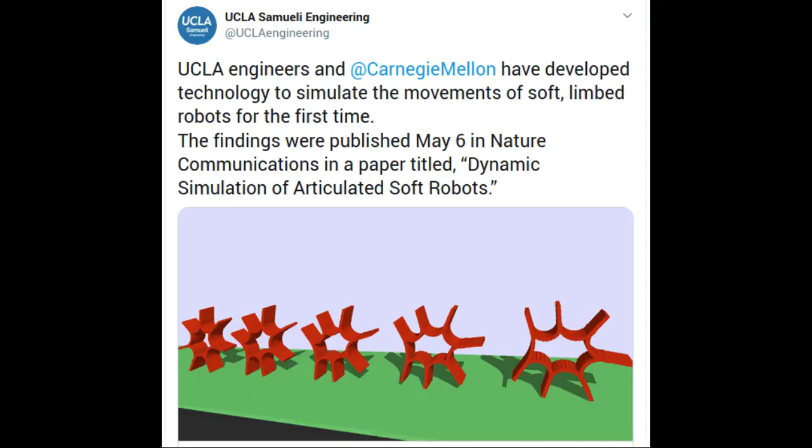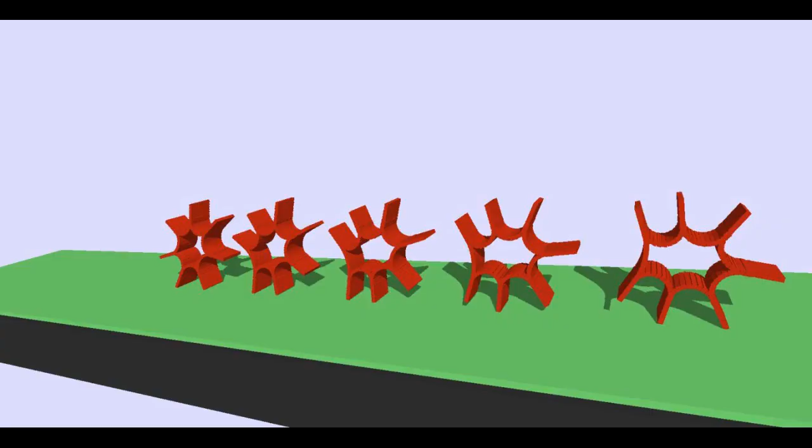Researchers have developed technology to simulate the movements of soft limbed robots for the first time. Soft robots are primarily composed of soft materials that can allow for mechanically robust maneuvers that are not typically possible with conventional rigid robotic systems. However, owing to the current limitations in simulation, design and control of soft robots often involve a painstaking trial.

Motion picture animation and video games are impressively lifelike nowadays, capturing a wisp of hair falling across a heroine's eyes or a canvas sail snapping crisply in the wind. Collaborators from the University of California, Los Angeles (UCLA), and Carnegie Mellon University have adapted this sophisticated computer graphics technology to simulate the movements of soft limbed robots for the first time.

The findings were published in the journal Nature Communications in a paper titled Dynamic Simulation of Articulated Soft Robots. The researchers have achieved faster than real-time simulation of soft robots, and this is a major step towards such robots that are autonomous and can plan out their actions on their own.

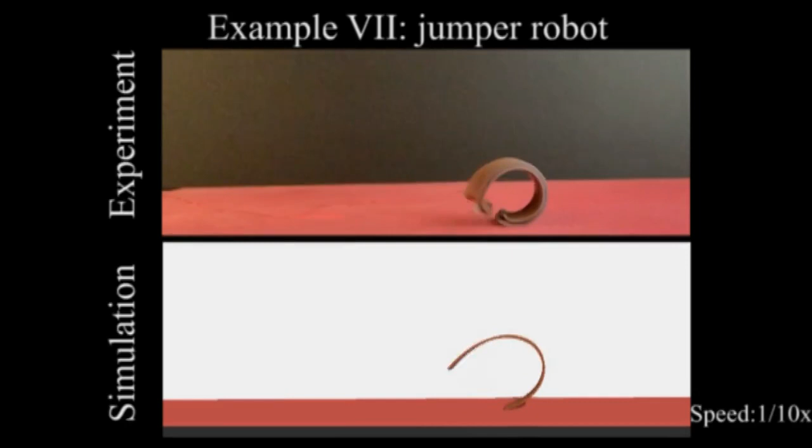Soft robots are made of flexible material which makes them intrinsically resilient against damage and potentially much safer in interaction with humans. Prior to this study, predicting the motion of these robots has been challenging because they change shape during operation. Movies often use an algorithm named discrete elastic rods (DER) to animate free-flowing objects. DER can predict hundreds of movements in less than a second.

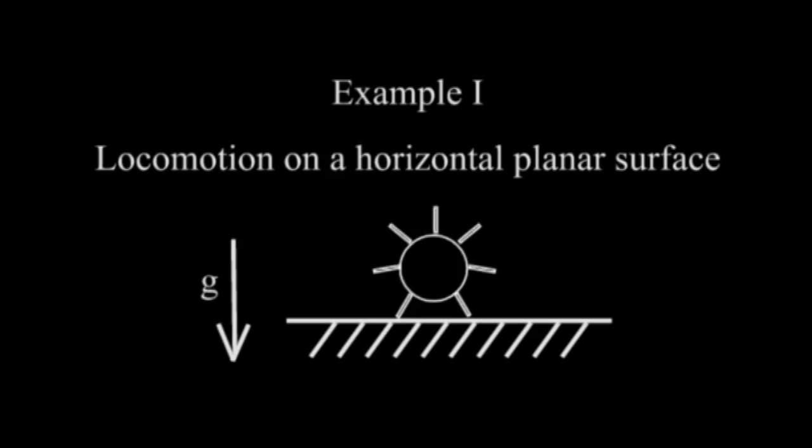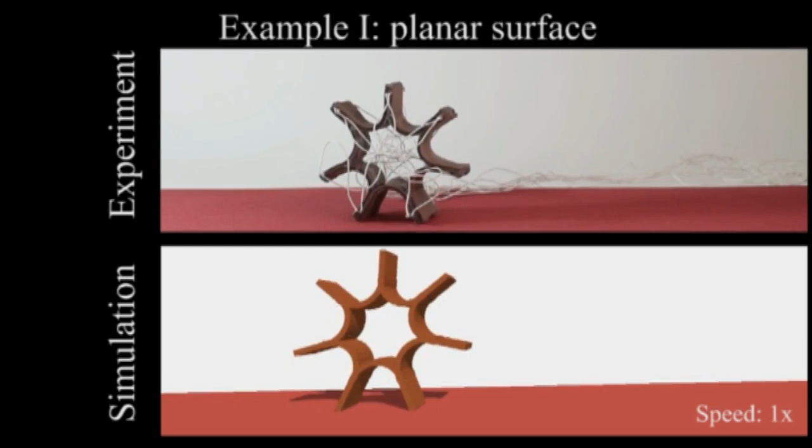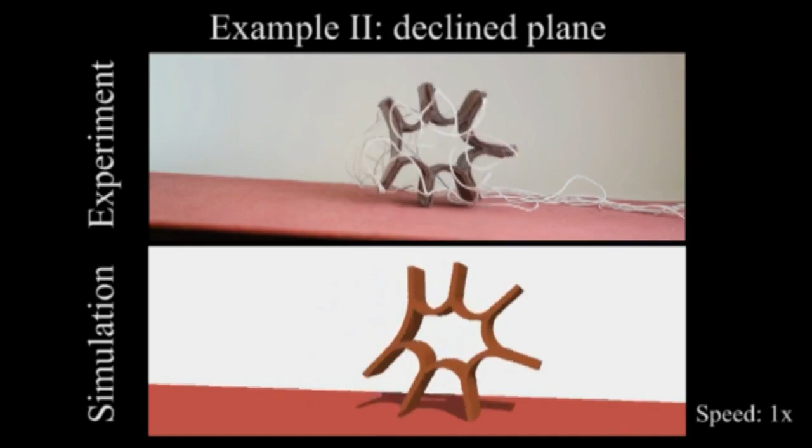The researchers wanted to create a physics engine using DER that could simulate the movements of bio-inspired robots and robots in challenging environments such as the surface of Mars or underwater. Another algorithm-based technology, finite element method (FEM), can simulate the movements of solid and rigid robots, but it is not well suited to tackle the intricacies of soft natural movements. It also requires significant time and computational power.

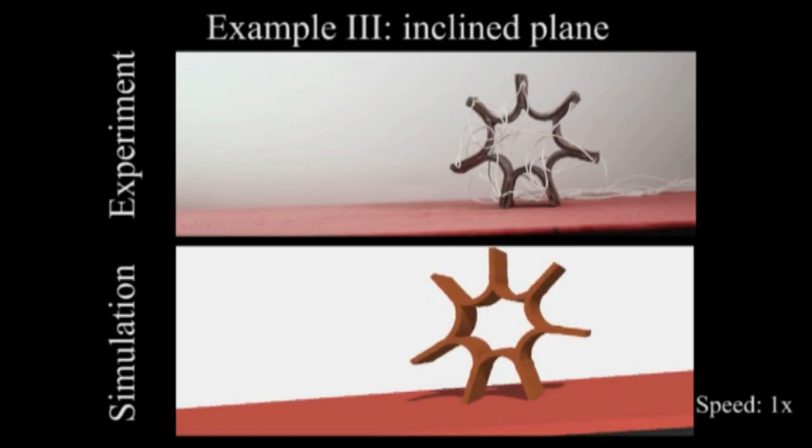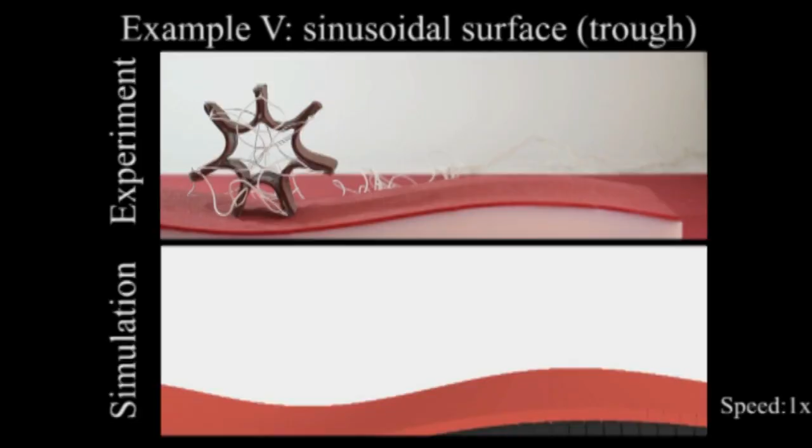Until now, roboticists have used a painstaking trial and error process for investigating the dynamics of soft material systems, design and control of soft robots. Robots made out of hard and inflexible materials are relatively easy to model using existing computer simulation tools. Until now, there haven't been good software tools to simulate robots that are soft and squishy.

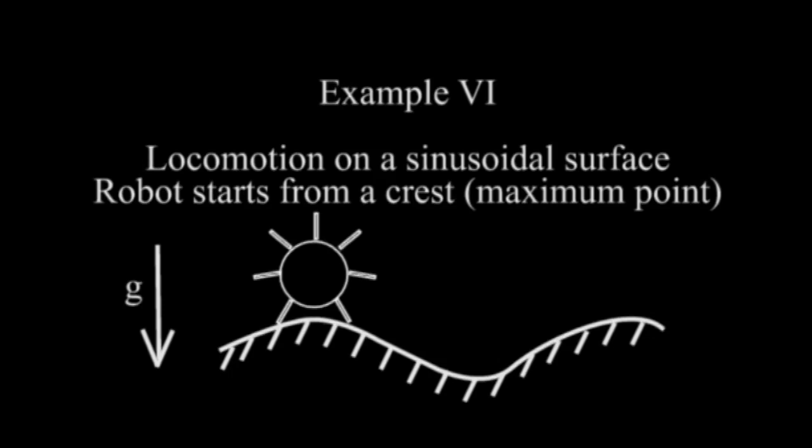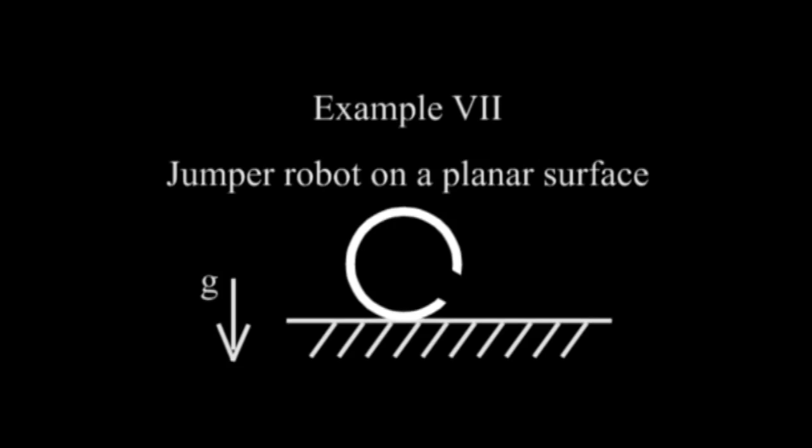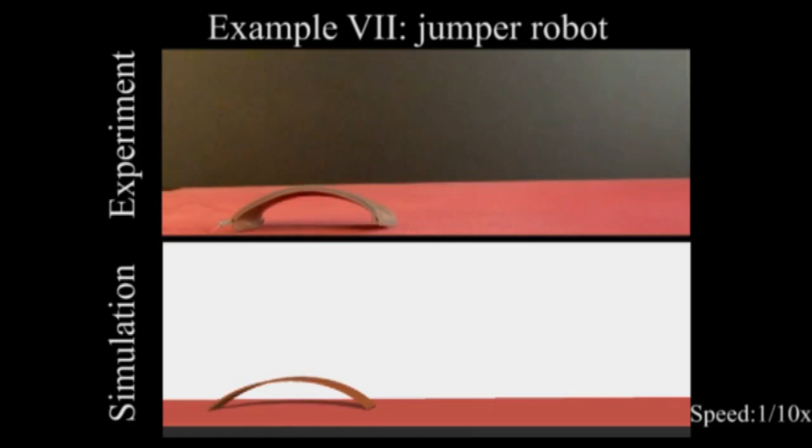This research work is one of the first to demonstrate how soft robots can be successfully simulated using the same computer graphics software that has been used to model hair and fabrics in blockbuster films and animated movies. The new simulation tool can significantly reduce the time it takes to bring a soft robot from drawing board to application. While robots are still very far from matching the efficiency and capabilities of natural systems, computer simulations can help to reduce this gap.